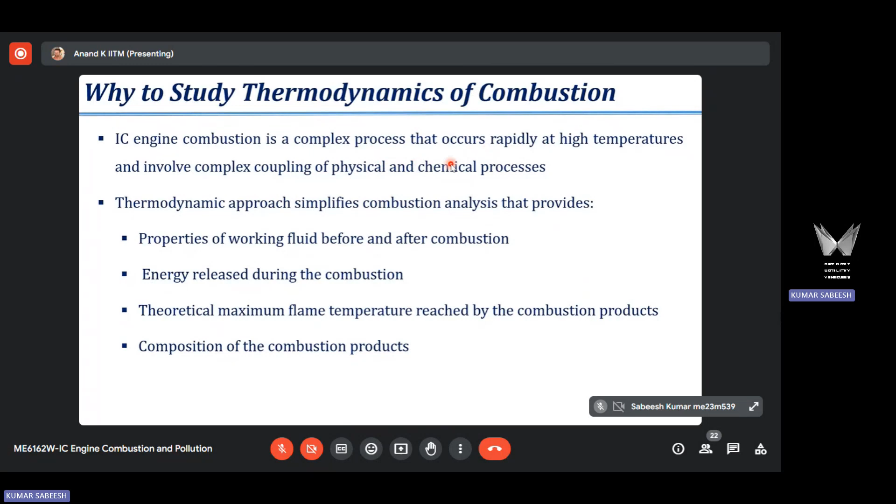It's very difficult to capture what is happening during combustion with any instrument available today - any combustion instrument finds it very difficult to capture this event precisely, because of this reason. Also, it involves several physical and chemical processes - complex coupling of physical and chemical processes.

So as I said, the process occurs rapidly. What is the time scale we are talking about? The engine cycle time itself is very low, and engine cycle time is a function of engine running speed.

So the time required for completing one engine operating cycle is inversely proportional to engine running speed. When engine running speed is high, the time required to complete a cycle will be less. Higher the engine running speed, lower will be the time scale. This is the time required for one cycle, and the combustion process duration is a fraction of the total engine cycle time.

So we have a cycle time, generally around the millisecond time scale, and the combustion event is one of the events during the entire engine cycle. It occurs during a fraction of the total engine cycle time. So generally this time scale will be around microsecond or nanosecond.

A very small time scale is taken to complete the combustion event, and the temperature involved is well above 2000 Kelvin during combustion, both in SI engine and CI engine. So it's a combination of very small time scale and very high temperature. That's why we don't have an instrument that can capture this event; the limitation of current instruments is that it's very difficult to measure due to this combination of high temperature and small time scale.

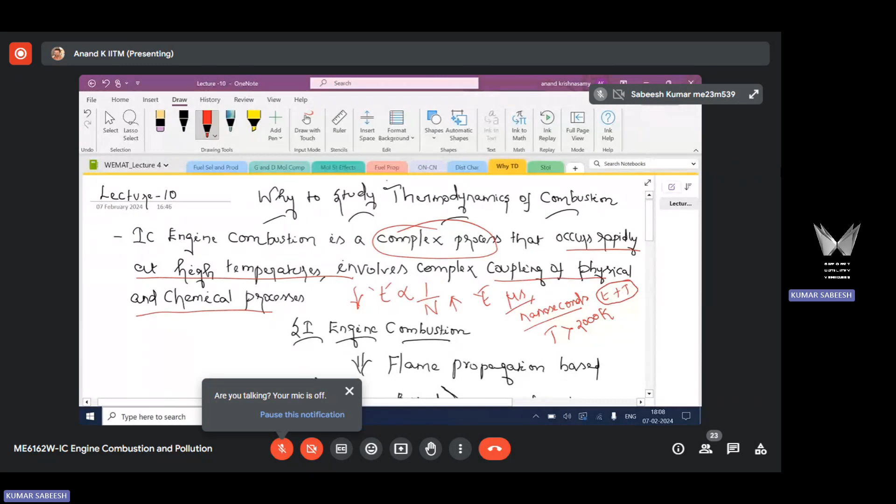So it's still not completely understood. This is one of the complexities of this process, and this process involves coupling of physical and chemical processes. I'll briefly talk about what physical and chemical processes are involved in SI and CI engine combustion. During the combustion event, these physical and chemical processes are coupled, meaning we cannot separate them, they are interlinked. Let us briefly look at how SI engine combustion happens, and then see how this coupling occurs.

In a spark ignited engine, as discussed earlier, we have a spark plug. We discharge an electric spark to initiate the combustion event, within two electrodes separated by a very small gap, less than 1 mm. You discharge a high voltage between these two electrodes, and within that gap you have a fuel-air mixture, within the ignitable range, contained in this electrode gap.

Once you discharge this electric spark, a flame gets formed here, and we need to form a stable flame; otherwise the combustion cannot sustain. So you are discharging the spark to initiate combustion, and for the event to sustain, the flame formed around the spark plug region has to be a stable flame.

This flame then moves across the combustion chamber. This is an optical engine image of the combustion event, and we are tracking how the flame moves at different crank angles: 3, 4, 6 and 8 degrees. ATDC is after top dead center; TDC is a reference point, which I will discuss more later in the combustion topic. Here we see how the flame moves across the combustion chamber over time, with time presented in terms of crank angle.

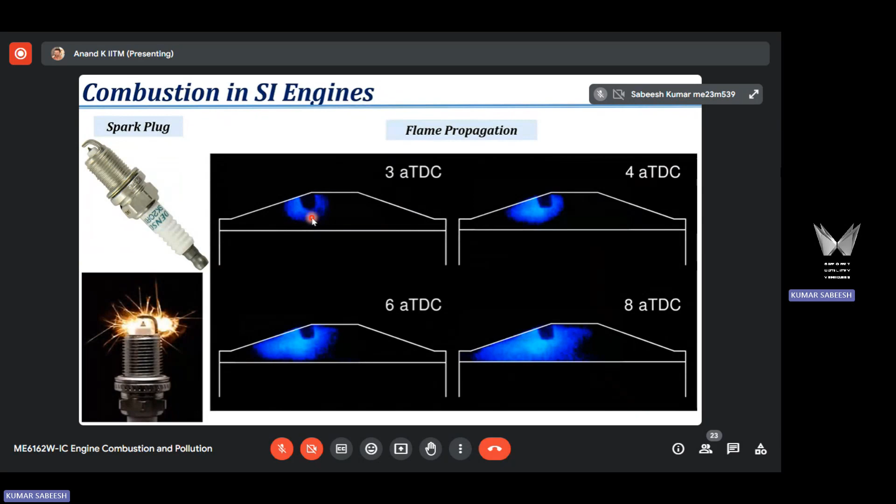Energy release happens in a typical spark ignited engine, and this energy release is what we convert into work in the engine, which is an energy conversion device. So overall, the combustion event here is a flame propagation based event, and this flame movement depends on both physical and chemical processes, which are coupled and interlinked; we cannot separate them. Now I will briefly discuss these processes.

Overall, SI engine combustion is flame propagation based; a flame moves across the combustion chamber, forming two regions. One is the burnt gas region, behind the flame front, and the other is the unburned mixture region, ahead of the flame front. So ahead of the flame front you have unburned fuel-air mixture, and behind it you have burned gases. These two regimes form in the combustion chamber because of the flame movement, and the flame has to move and ignite this mixture.

I already discussed normal and abnormal combustion in SI engines. Abnormal or knocking combustion happens when this unburned mixture starts to self-ignite. If there is any self-ignition of the unburned mixture, there is knocking combustion, which can damage the engine in the worst case scenario.

This is what we discussed in chapter 1 when we discussed antiknock quality of fuel. This is one of the important fuel quality requirements. This unburned mixture has to resist self-ignition, and at any point of time, the flame has to ignite the mixture. This is normal combustion.

We are talking about how the flame moves inside the combustion chamber, and this flame movement is governed by both physical and chemical processes. What are the physical processes involved? One is heat transfer, the flame will radiate heat. There are different modes of heat transfer, but the predominant mode during the combustion event is radiation. The flame radiates heat to the unburned mixture from the burned zone to the unburned zone. Convective heat transfer also takes place, but radiative heat transfer is predominant. So there is heat transfer, a physical process, from the burned region to the unburned region, and the unburned mixture temperature will rise because of this heat transfer.

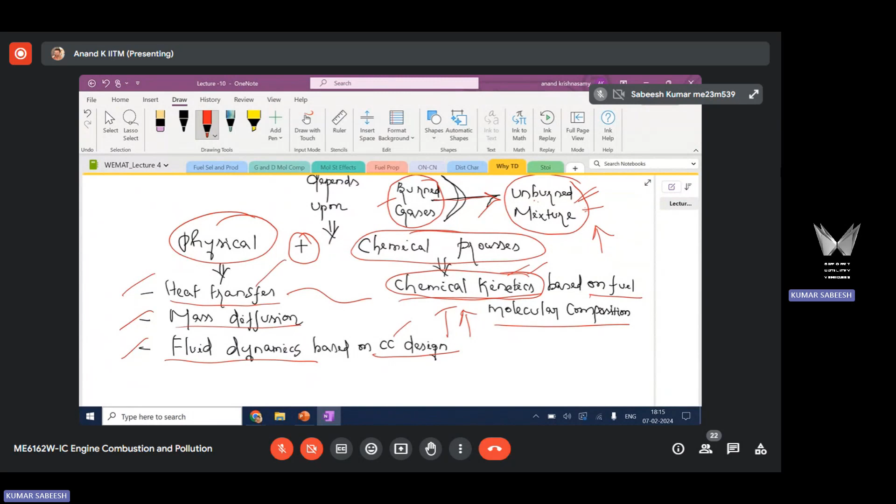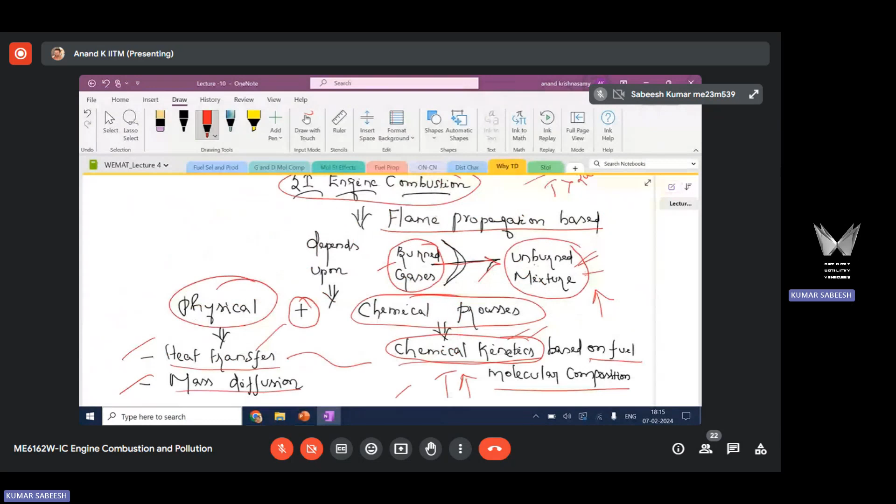These two processes, physical and chemical, are coupled, meaning they are interlinked. For example, the way heat transfer happens affects the rate at which chemical reactions take place, since chemical reaction rate is highly sensitive to temperature. When temperature increases, kinetic rate also increases, and temperature rise is primarily due to heat transfer from the flame zone to the unburned mixture. So the physical process affects the chemical process, and vice versa: the rate of chemical reactions affects thermal energy release, which affects the heat transfer happening in the combustion chamber. These two processes are coupled and interlinked, and the overall flame movement in the combustion chamber is due to both the physical and chemical processes.

So this is how the SI engine combustion event happens. I'm going to discuss more about this later on. Now we are looking at why we are studying thermodynamic aspects of combustion, and what is the complexity in the actual combustion event. This is what we are looking at now.

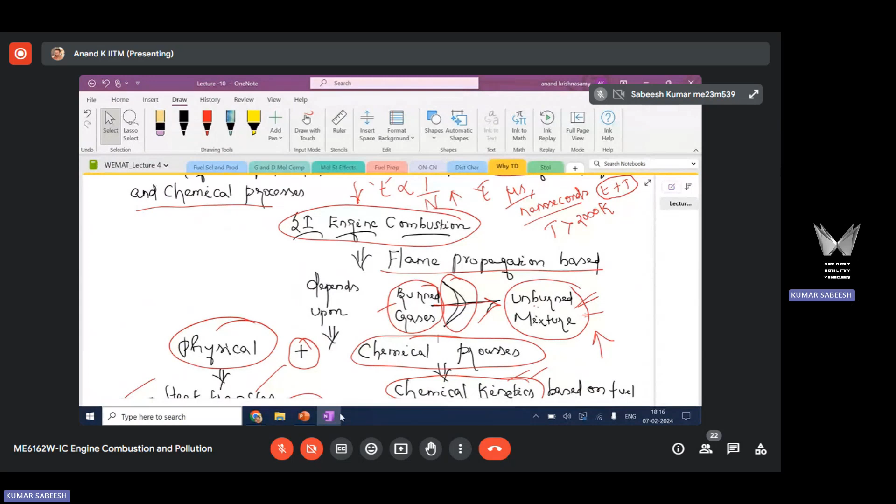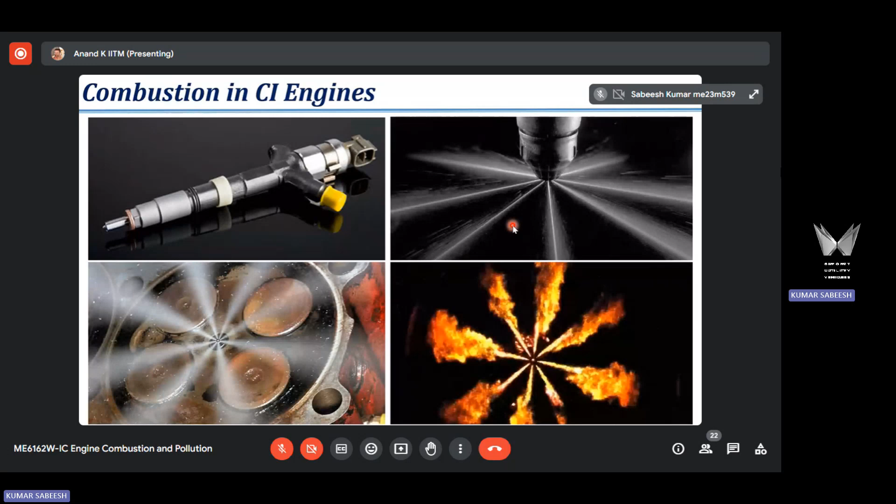So when you look at CI engine combustion, as we earlier discussed about the role of fuel, in the CI engine we spray fuel at very high pressure near the end of the compression stroke. What do you have inside the cylinder when you spray the fuel? You have air, at higher pressure and higher temperature based on the compression ratio, typically around 30 bar and 700 Kelvin, which changes based on the compression ratio of the engine. So you have air residing in the cylinder at high pressure and high temperature, and you spray fuel at very high pressure into this air. After this, you have a sequence of processes that happen one after another, involving both physical and chemical processes. So what are those physical and chemical processes?

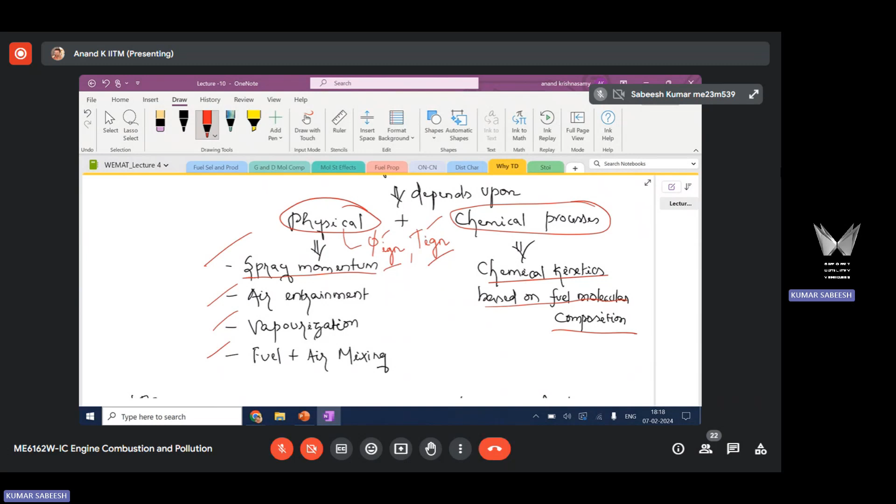Overall, this combustion event in a CI engine is referred to as a mixing controlled combustion event, because until you have created this ignitable mixture, there is no combustion at all. That's why mixing, fuel-air mixing, carries a significant role in CI engine combustion. That's why it is referred to as mixing controlled combustion event.

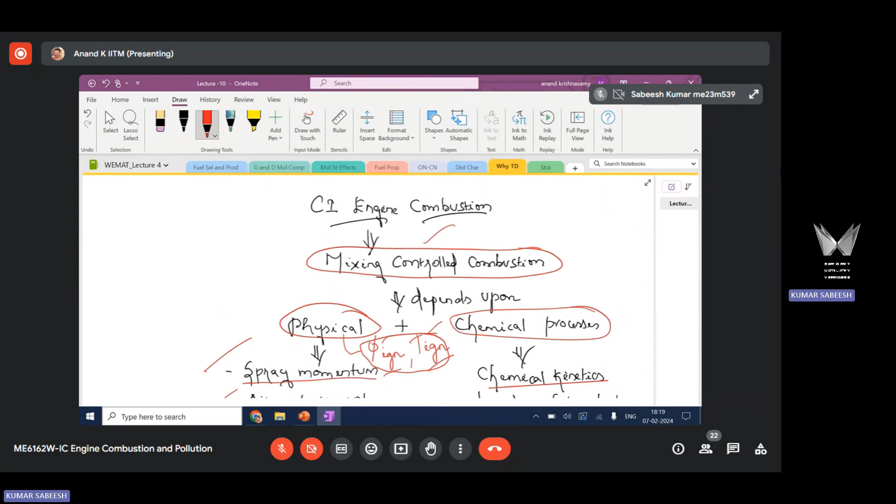Once you have this, you have chemical kinetics taking place, and these two are coupled, as you could see. Because of the chemical kinetics, thermal energy is released. When thermal energy is released, you have higher temperature inside the cylinder that will improve the physical process, meaning the mixing. You have a liquid phase fuel that should get into gas phase through absorption of latent heat, and then it has to mix with air within the ignitable range. So this thermal energy release during the chemical process is helping in the physical process.

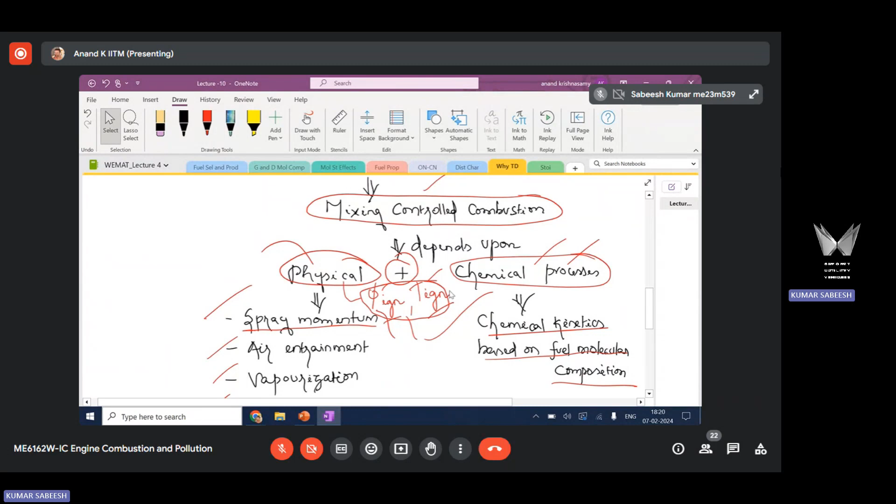Until you have an ignitable mixture, there is no chemical reaction at all. Chemical kinetics cannot get started until you have an ignitable mixture. Thus, you can see that these two processes are interlinked, coupled, and because of that, the combustion event is happening in a CI engine. So overall, combustion in a CI engine is a mixing controlled combustion, and in an SI engine it's a flame propagation based combustion. Nevertheless, both events happen at very high temperature with a very small time scale. So it's a combination of small time scale and very high temperature. This is the complexity of IC engine combustion process.

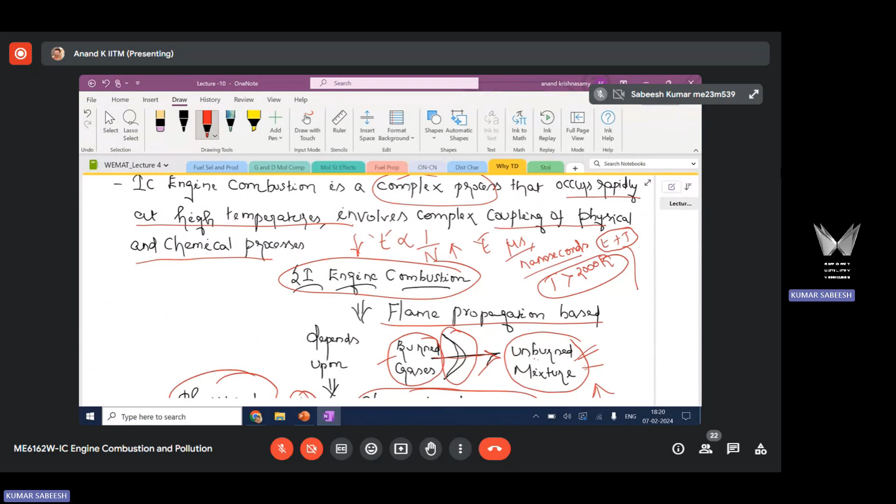Considering this complexity, we are starting with the simplified thermodynamic based approach. This approach simplifies the analysis of combustion because, as you know, the thermodynamic approach involves an equilibrium based approach, and this is applied to a state of a working fluid. State, when I say state, is a collection of properties existing in an equilibrium state. So when I say I am going to do a thermodynamic analysis of the combustion process, I mean I am going to consider an equilibrium based approach.

I am going to consider the state of the working fluid before the combustion event and after the combustion event. What is happening during the combustion event is highly transient, right? Thermodynamics cannot pitch in there. But what we do here is focus on the state of the working fluid before combustion and after combustion. Why do we do that? What kind of useful information can you get by doing this thermodynamic analysis?

This thermodynamic analysis provides vital information about the combustion event. It provides information about the properties of the working fluid before and after combustion, and an estimate of how much energy is released during combustion. This is done by applying the first law of thermodynamics, which gives an estimate of how much thermal energy is released because of the combustion event.

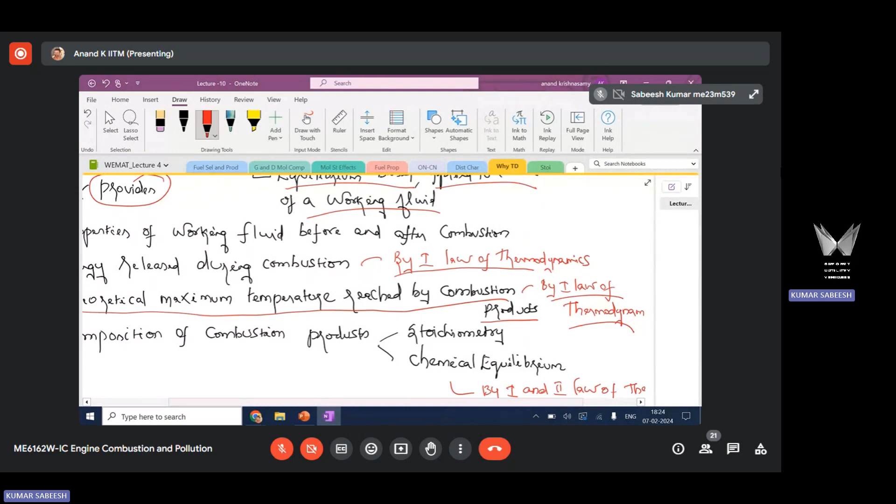Also, this maximum temperature is going to affect the products. Some of the combustion products are pollutants. Later on, we are going to see how temperature affects pollutant formation. But this temperature information is also useful to get an estimate of the combustion products - some of which are pollutants. So this product information can be indirectly obtained by knowing the maximum temperature reached by the combustion system.

So this maximum temperature can be obtained by thermodynamic analysis. The other useful information you can get is the composition of the combustion product. Some of these products, as I said, are objectionable pollutants. This is where the objection for IC engines is coming in. So we do a lot of research on these pollutants that are emitted from IC engine combustion.

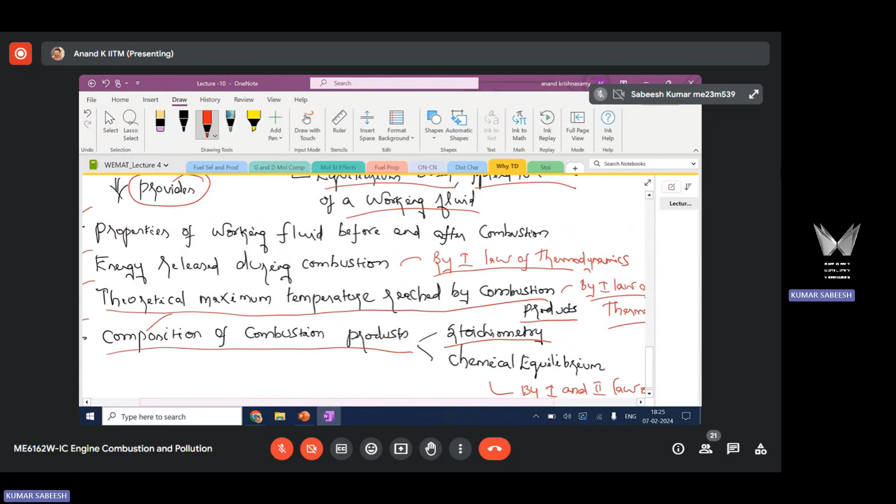So you need to track the composition of the combustion product because some of them are pollutants. By applying thermodynamic principles, you can get an estimate of the composition of the combustion product. There are two approaches here: one is the stoichiometry-based approach, which provides combustion product composition. The second approach is the chemical equilibrium-based approach.

This chemical equilibrium approach is based on the first and second laws of thermodynamics. The stoichiometry-based approach is a simplified approach - it will give you only some minimal composition. You cannot get all the product information by applying stoichiometric principles. Only the major species present in the combustion products can be obtained, and this species information can be obtained by stoichiometric principle.

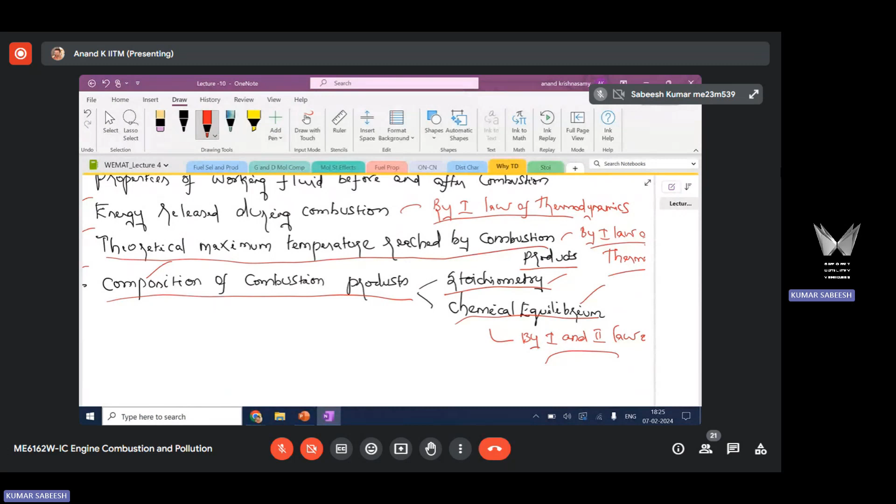More product information can be derived by applying chemical equilibrium. So these are the useful pieces of information you can get by applying thermodynamic principles, and that is where it is useful - you get important combustion parameters which will help you analyze a combustion event. That is the reason why we start with a thermodynamic based approach, and then move on into the actual combustion event.

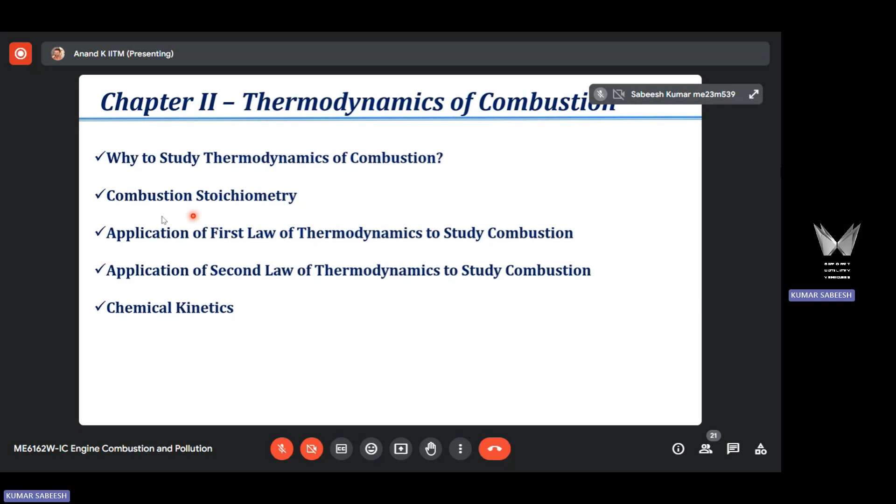So we have just now discussed why we are studying the thermodynamic based approach to start with. The next topic I'm going to talk about is combustion stoichiometry.

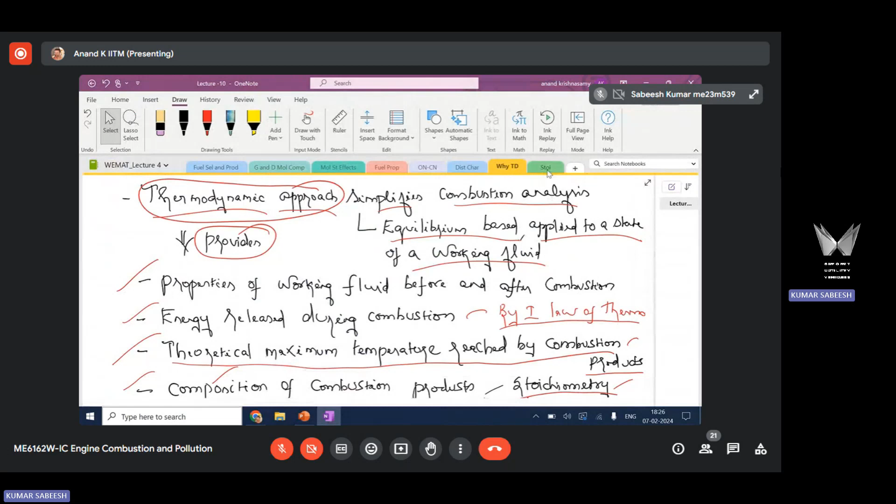So when I say that we are talking about stoichiometry, stoichiometry refers to the chemically correct proportion of fuel and air that we consider. This is one of the principles we use to get the composition of the major combustion products, not all products. You can get information about the composition of major combustion products by applying the stoichiometric principle. So what does this stoichiometry mean? It deals with the minimum quantity of air required for the complete combustion of 1 mole or 1 gram of a fuel.

Generally chemical equations are written on a molar basis, but engine analysis and combustion analysis are generally on a mass basis. So we will start with discussion of these principles on a mole basis, and then I'll explain how we can convert from mole to mass basis. So stoichiometry is nothing but the minimum air required for complete combustion—note this word, complete combustion—of 1 mole or 1 gram of a fuel.

By applying the stoichiometric principle, we relate the composition of the combustion products with the reactants, based on the conservation of atoms or mass of each element in the reactants and products. You have a combustion phenomenon happening with fuel and air, which are reactants, leading to various products. What we do here is get information about the product composition by relating products with reactants. How do we relate this? Based on conservation of mass or conservation of atoms, meaning the total atoms in the reactants and total atoms in the products are conserved. Similarly, the total mass of each element in the reactants and products are conserved. This is the conservation principle we apply to get information about the product composition, which is what we want.

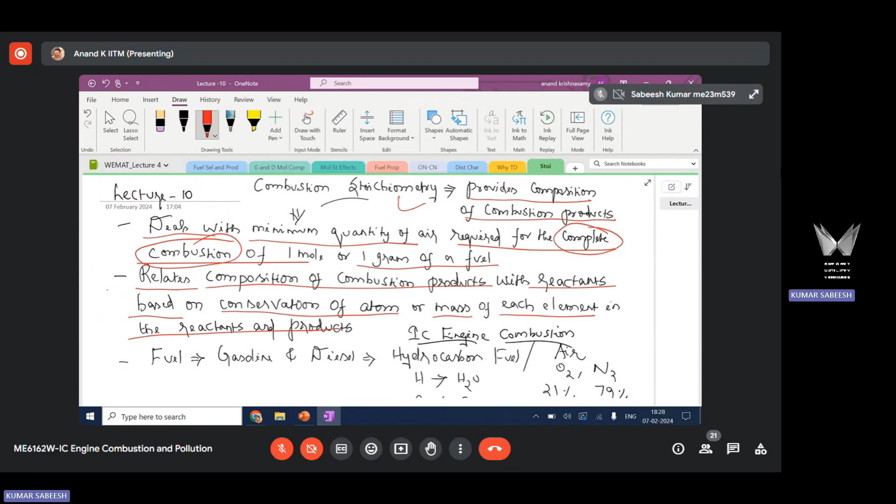Here we deal with IC engine combustion, meaning the fuels we consider are gasoline and diesel, which are hydrocarbon fuels. In the first unit we spent time understanding gasoline and diesel, and we understood that they are hydrocarbon fuels primarily consisting of carbon and hydrogen. Carbon is around 84%, hydrogen is around 14%, and the remaining 2% are trace elements. So the major atoms present in gasoline and diesel are carbon and hydrogen.

So here we are talking about complete combustion. Hydrogen will burn to H2O and carbon will burn to CO2 when we apply the stoichiometric combustion equation. So we have two major elements that burn to CO2 and H2O.

And we are combusting this hydrocarbon fuel with air. In air, the two major components are oxygen, 21% by volume, and nitrogen, which is 79% by volume. In fact, nitrogen is actually 78%—I have absorbed all the other trace elements into nitrogen. So you will have argon, CO2, and other trace elements; I use the word trace elements because their composition is very small. All those are absorbed in nitrogen, and that's why we consider it as 79% nitrogen and 21% oxygen.

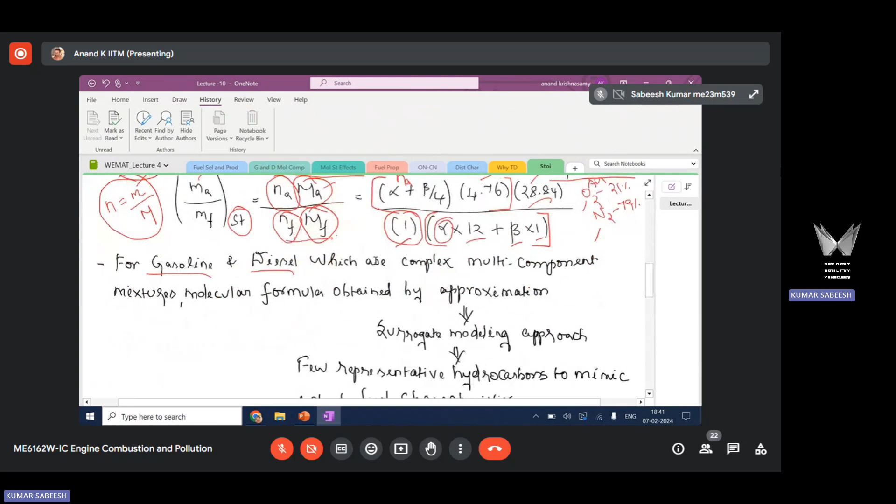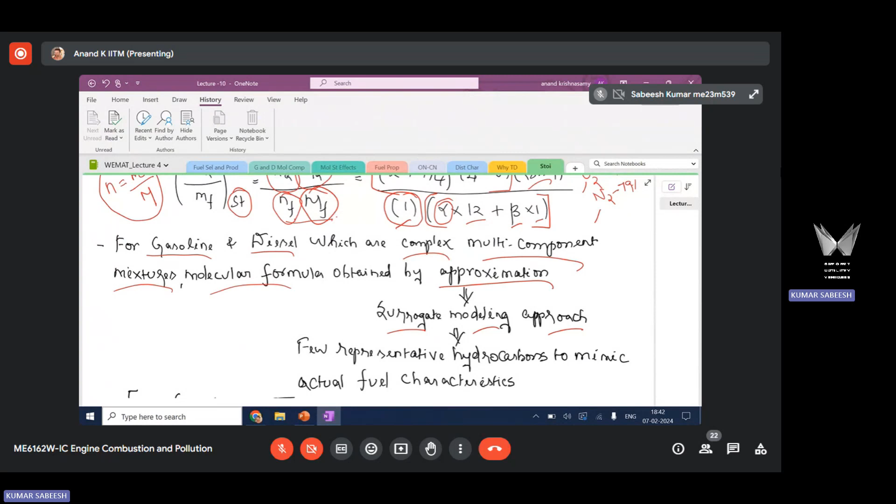Gasoline and diesel are complex multi-component hydrocarbon mixtures, consisting of around 1,000 different hydrocarbons, as we discussed in the first chapter. They are a complex mixture, so how do we go about it? How do we get alpha and beta? You have to do some approximation here. This approximation is referred to as surrogate modeling approximation or approach. So what we generally do is use the hydrocarbon class information of gasoline and diesel, which is already known to you, as we discussed in the first chapter.

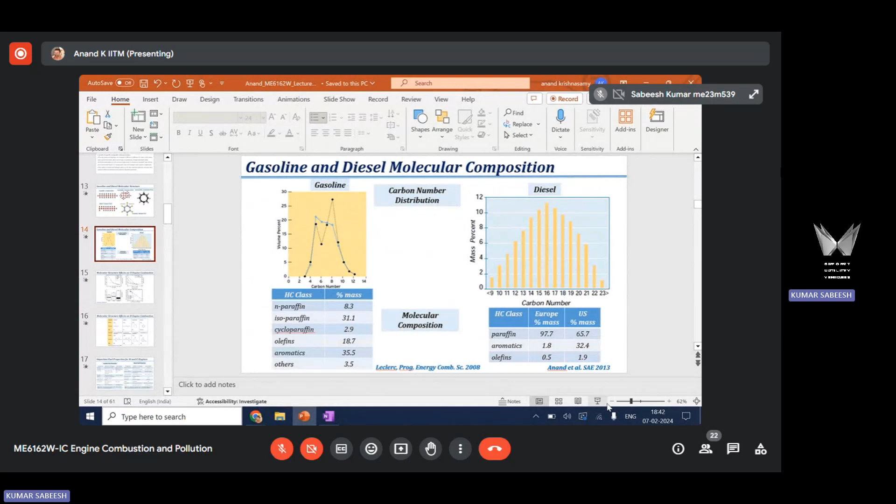So this is hydrocarbon class information for gasoline and this is for diesel. This information is known to you. What you do is, once you know this hydrocarbon class information for gasoline, you take one or two representative hydrocarbons for each class.

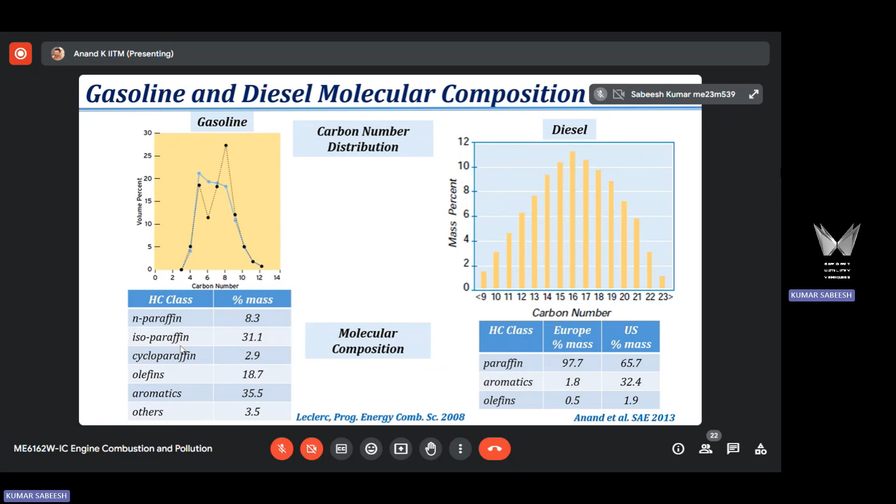This approach is called surrogate modeling approach. We choose only a few hydrocarbons in each class. From that you will be able to get the molecular formula for gasoline or diesel that you need in the combustion equation. Once you have that, you will get alpha and beta.

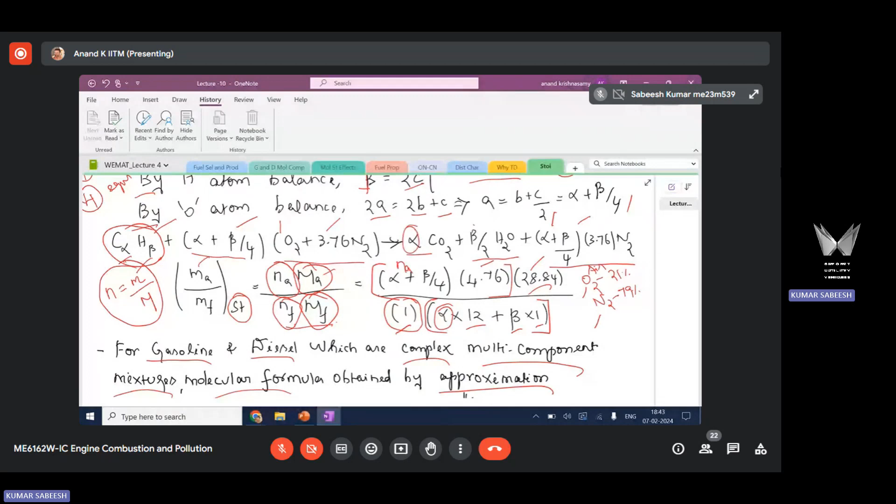Once you have alpha and beta, the entire equation can be written. You could see that the entire equation is written in terms of alpha and beta, only these two values. So we do this surrogate modeling approach. It's an approximation wherein we choose a few hydrocarbons to mimic or capture the characteristic of the gasoline or diesel.

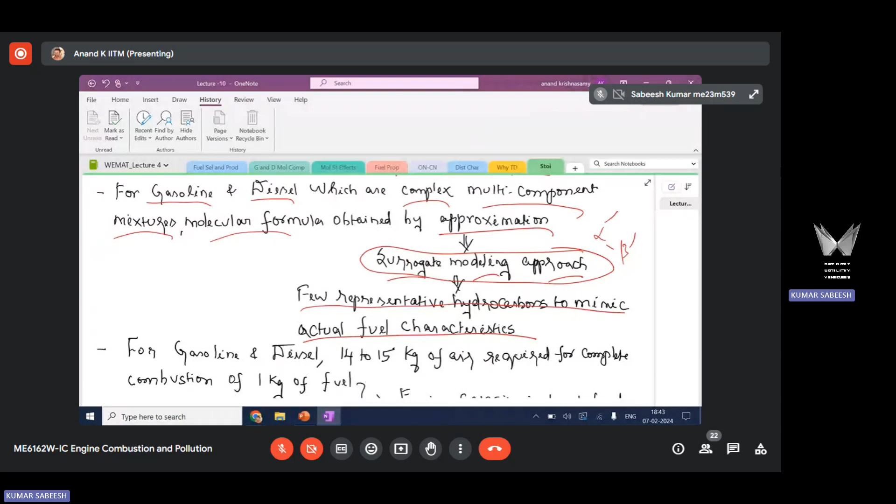Once you know this, you know alpha and beta. Once this is known, you will be able to write the combustion equation. And so what you need to know here is, for complete combustion, you need around 14 to 15 kilograms of air for complete combustion of 1 kilogram of fuel. To burn 1 kg of gasoline or diesel fuel, you need around 14 to 15 kilograms of air.

This is what you derive based on this stoichiometric analysis. And this information is important or critical when you design the engine, because you need to fix the capacity of the engine, the displacement volume. This capacity can be fixed once you know how much air is required to burn a given mass of fuel. Although it is a theoretically correct proportion, this is important information that you need to have.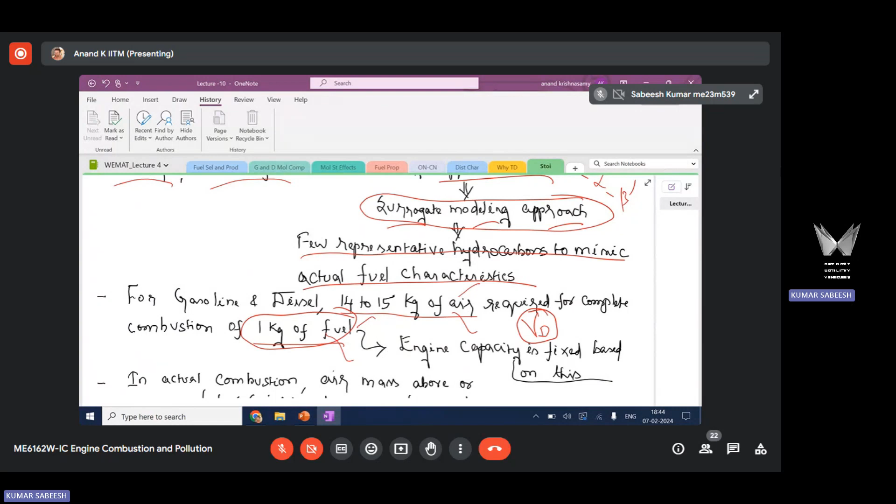How much fuel you are going to burn in the engine is based on the rated power of the engine. Rated power will help you fix the fuel quantity. Once you know the fuel quantity, you can fix the air quantity. Based on that, you can fix the displacement volume VD for the engine, which is fundamental design information you need. So this stoichiometric analysis helps you fix the engine capacity based on the rated power output you need for the engine.

So we know that in an actual combustion event, air mass above or below the stoichiometric proportion is used. We don't always use stoichiometric proportion of fuel and air, which is the theoretically correct proportion. We always use either a higher value than stoichiometry or a lower value. So to deal with the actual requirement of using higher or lower air mass, this fuel air equivalence ratio is introduced.

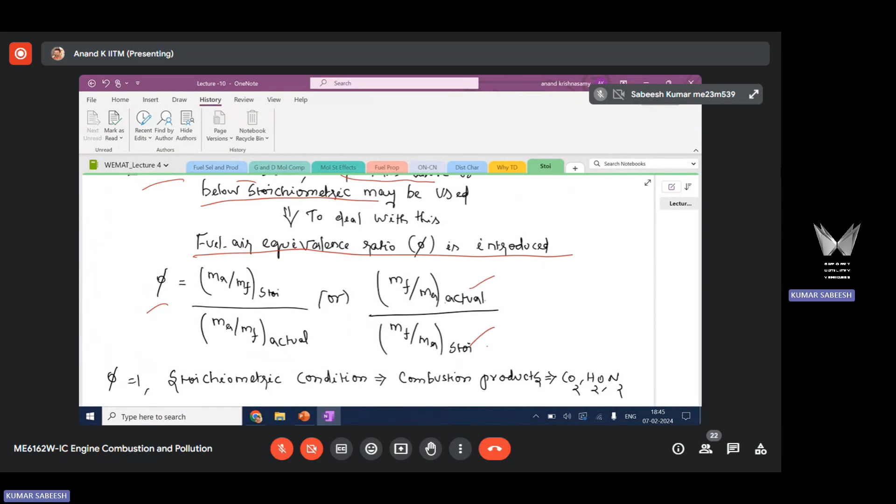What is this fuel air equivalence ratio? This is the definition for fuel air equivalence ratio. You could see that this is defined based on actual fuel mass to air mass divided by stoichiometric proportion of fuel mass to air mass. This is one way of defining equivalence ratio.

The other way of defining equivalence ratio is presented here: air mass to fuel mass based on stoichiometric proportion, air mass to fuel mass based on actual proportion. These two are the same, just written in different forms. The equation is the same, either written with fuel in the numerator or air in the numerator.

When you write fuel in the numerator, it is actual fuel to air mass to stoichiometric fuel to air mass. Otherwise, if you write air in the numerator, it will be stoichiometric proportion of air mass to fuel mass with respect to actual air mass to fuel mass. That is how this equivalence ratio is defined. Basically, it captures the effect of using higher or lower air mass than the stoichiometric proportion.

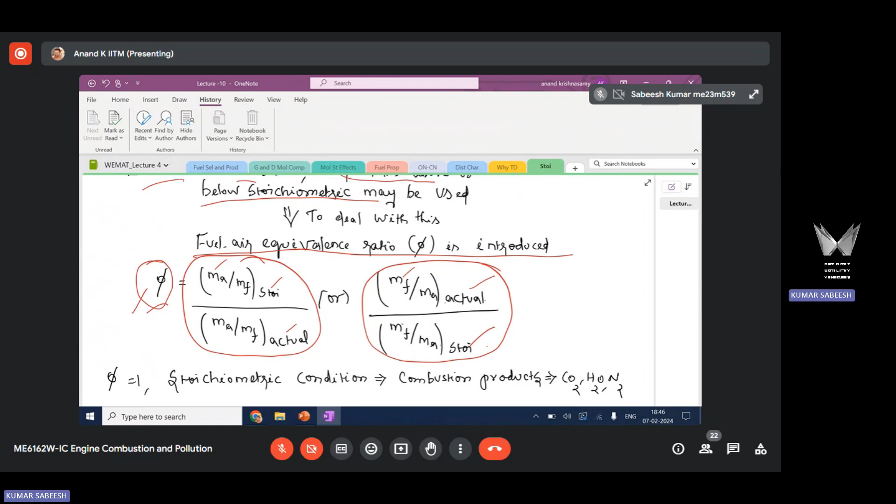Now, with this definition of equivalence ratio phi, there are three possible conditions. One is phi equal to 1, which is called stoichiometric condition. With stoichiometric condition, the major combustion products are CO2, H2O, and nitrogen, again assuming nitrogen is not oxidizing due to lower temperature. Apart from this, there are other species the engine will emit as a result of combustion, but these three are the major products.

The other condition is phi greater than 1. When phi is greater than 1, what does it imply?

When phi is greater than 1, actual fuel mass to air mass is greater compared to stoichiometric fuel mass to air mass, meaning I'm using more fuel than the chemically correct proportion. This condition is referred to as fuel rich condition or fuel rich combustion.

When you allow engine to undergo fuel rich combustion, these are the major combustion products: CO2, H2O, and N2. Apart from this, you will have CO and H2 as major species. CO is a product of incomplete combustion. So when you have fuel rich combustion, it means you have less air. Because of less air, you will have incomplete products like CO and H2 in larger proportion in the engine exhaust. So this will be the product composition in case of fuel rich combustion.

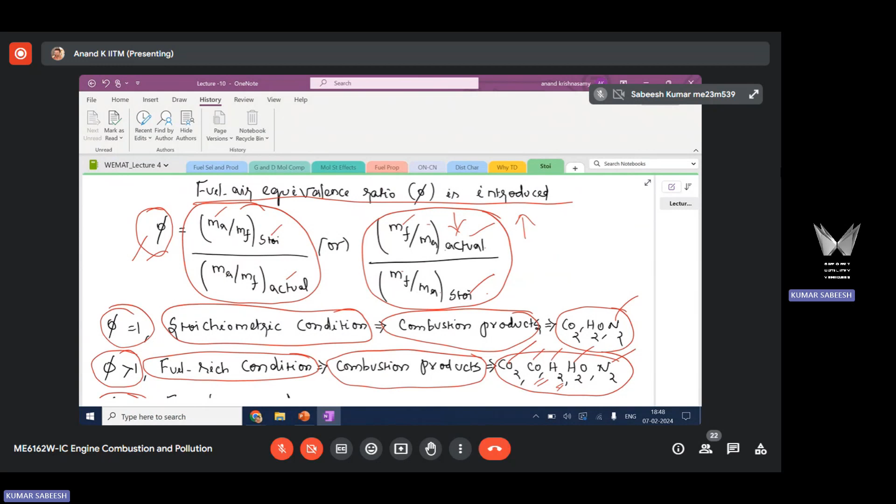The third situation is phi less than 1. When phi less than 1, it means you are using less fuel mass to air mass compared to the stoichiometric proportion of fuel to air mass. You are using less fuel than the stoichiometric correct proportion. This you can call fuel lean condition or fuel lean combustion.

If you have fuel lean combustion, these are the major products you can expect in the engine exhaust: CO2, H2O, N2. Apart from this, you will have oxygen in the product, because it's a lean combustion, you are using more air than what is theoretically required. Because of using more air, this excess air will appear in the exhaust product.

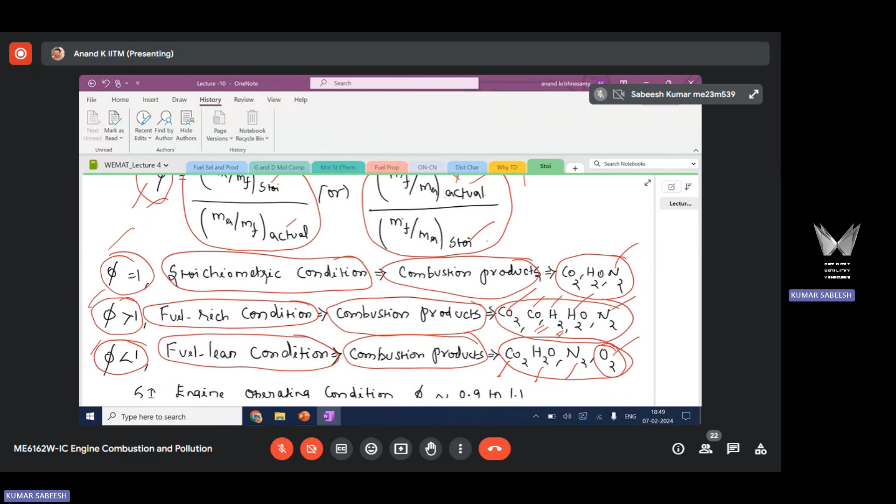So these three are the possible situations encountered by the engine in actual operation, when you run a SI engine or CI engine. All these three possible conditions happen, either stoichiometric or fuel rich or fuel lean combustion, in both SI engine as well as CI engine.

Now, when you look at the SI engine operating condition, the phi value will be in a closer range of 0.9 to 1.1. This is true for any kind of SI engine, whether it's smaller or larger. This is the operating phi range for spark ignited engine, irrespective of engine size. So you see that you are running close to stoichiometric condition, most of the time.

Later on, when we discuss the combustion event in detail, you will understand why we run SI engine with such a close phi range, closer to stoichiometric condition. One of the major reasons is you can maintain a stable flame only if you run the engine under this phi range. SI engine combustion is a flame propagation based combustion. To maintain a stable flame, your phi should be closer to stoichiometric value, otherwise it's very difficult to maintain a stable flame.

The other reason is the three-way catalytic converter, which is most commonly used. This converter efficiency is high only if you run the engine close to stoichiometry. Later on we will see why efficiency is high under stoichiometric proportion of operating phi. But here, just note that because of these two constraints, flame stability is better and catalytic converter efficiency is very high under stoichiometric condition. Because of these two reasons, you run SI engine close to stoichiometric, within a very close margin of phi.

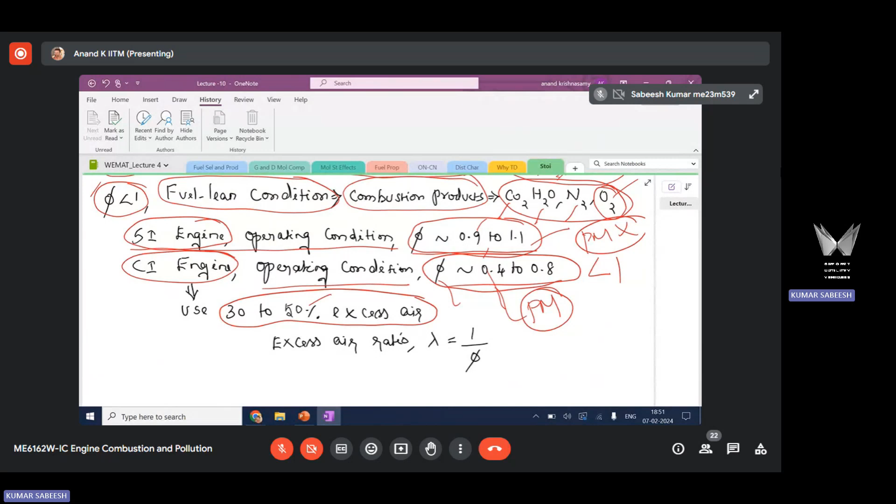One reason is this phi value, although overall lean, you have heterogeneous combustion in a CI engine. This heterogeneous combustion leads to locally rich mixture, which is what causes particulate emission. You have particulate emission problem only in diesel engine, not in SI engine, because SI engines undergo homogeneous combustion while CI engines undergo heterogeneous combustion. That's why the overall equivalence ratio is maintained very lean, with around 50% excess air, to avoid high particulate formation.

There is something called excess air ratio lambda, which is the reciprocal of phi. Lambda is equal to 1 upon phi. I generally prefer to use phi rather than lambda, but in some combustion analysis, people also use lambda, which is nothing but the reciprocal of phi. It's time up, I stop here. If you have any questions, you can ask me.

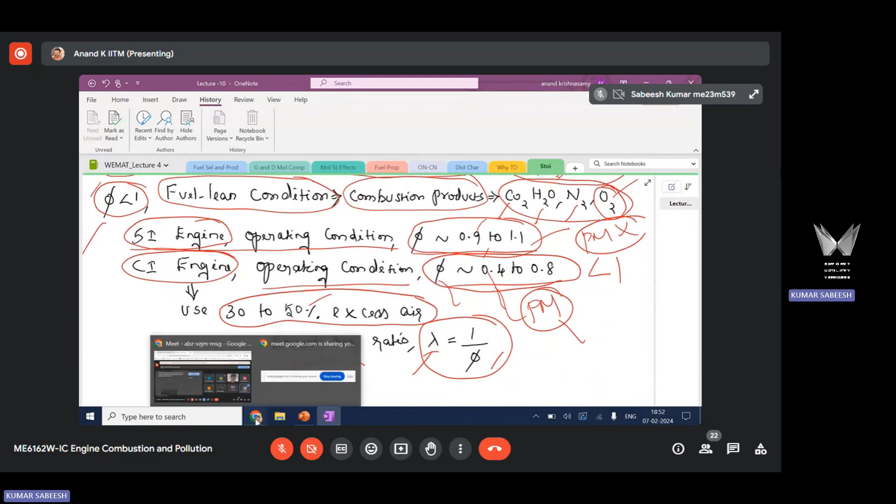Are there any questions? Yes, sir, just a minute.

Sir, like you mentioned, it is very difficult to analyze the flame propagation and combustion behavior. So in case of any issue, like if we are in the development stage of a new engine and we see any issue, or we are not able to achieve the estimated power or other performance metrics, if we are predicting, how do we resolve it? What is the approach to go with, sir?